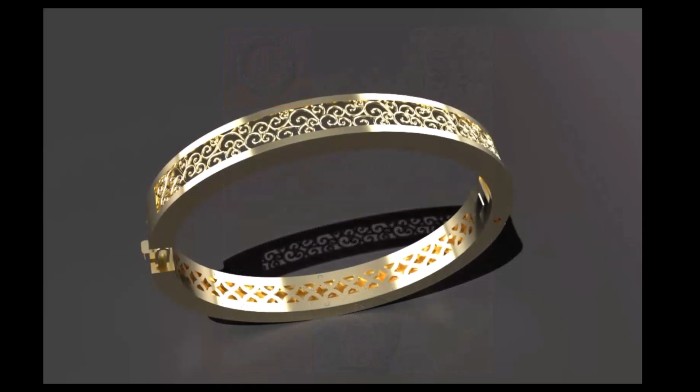Today I'm going to show you how to add a backplate to the hinged bracelet I made a while ago, and that video is in the description below. I also added a lock which fits this bracelet.

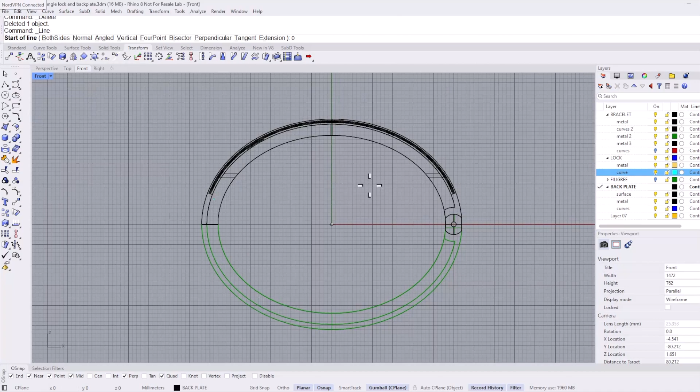I'm going to start with the lock. Go to the front viewport and draw a line from 0, somewhere around here. Then I'm going to make a plane from this line, using a gumball, grabbing the green dot with shift for both sides, and boolean split.

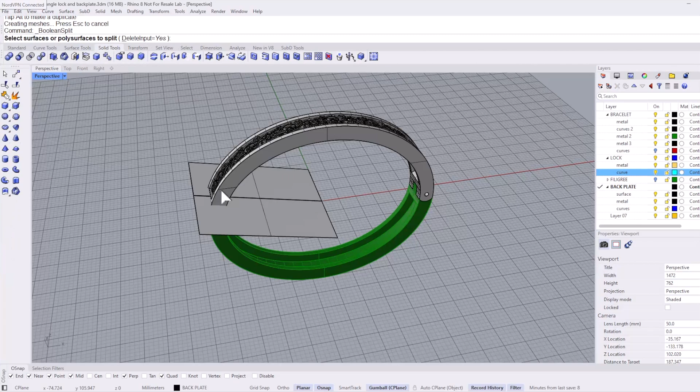In order to make this lock, I will isolate this piece. I love using this isolate object command so I can solely work on this piece. What I'm going to do is create a housing for the lock, but it needs to be a solid piece.

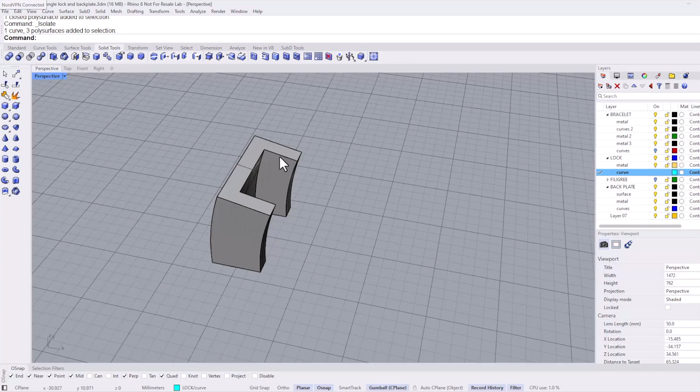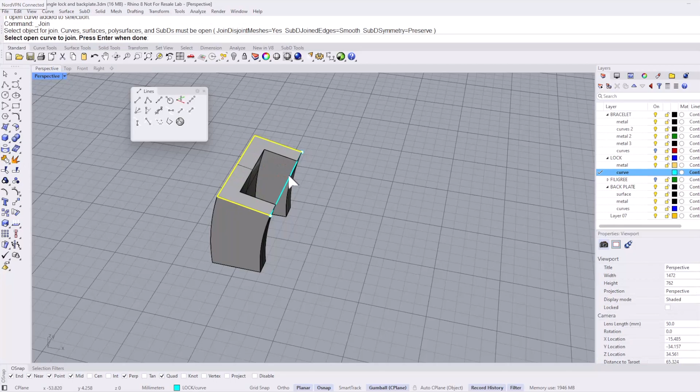I'm going to go to duplicate edge, duplicate the outside edge and create a line, then join to create a closed curve. And do the same thing at the bottom: duplicate edge, join, and create a closed curve.

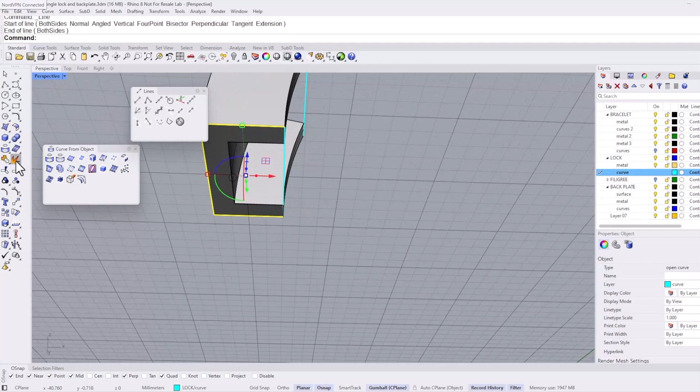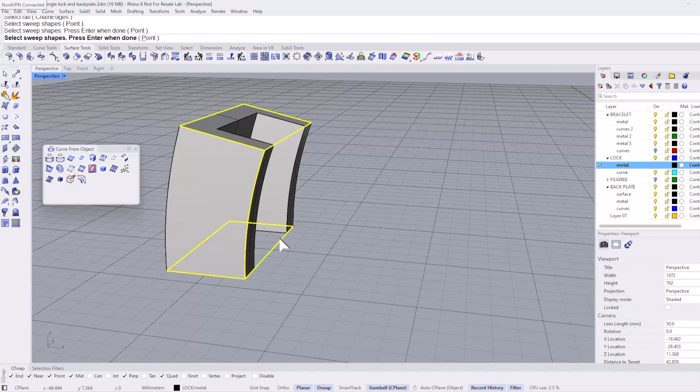I will just sweep one rail. I need a rail, so duplicate the edge for the rail. Sweep one rail - this is the rail, and these are the sweep shape. Here we go. Then I'm going to delete the original one.

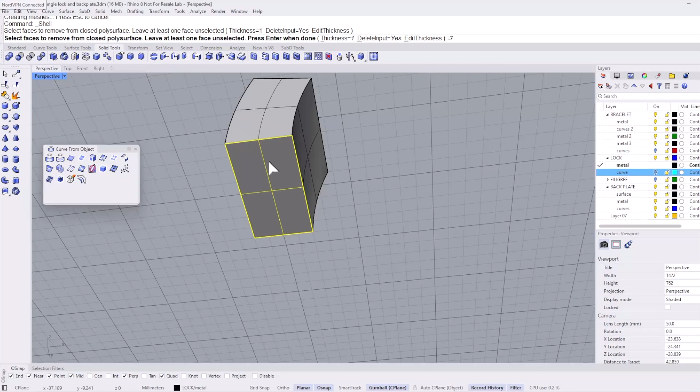I'm going to cap to make it solid. Looking at the bottom, I will hollow it out using a shell command. I'll click this bottom surface, and the thickness is 0.7 millimeter, and enter.

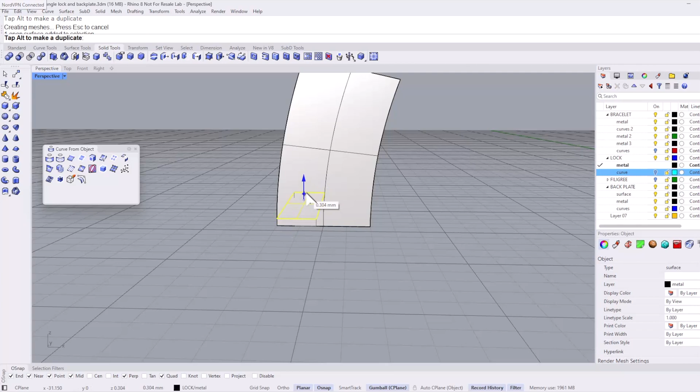Okay, then Control Shift to select this edge, and I'm going to extrude this edge to the surface. I will extrude this surface to create a solid, maybe 0.6 millimeter. Then boolean union.

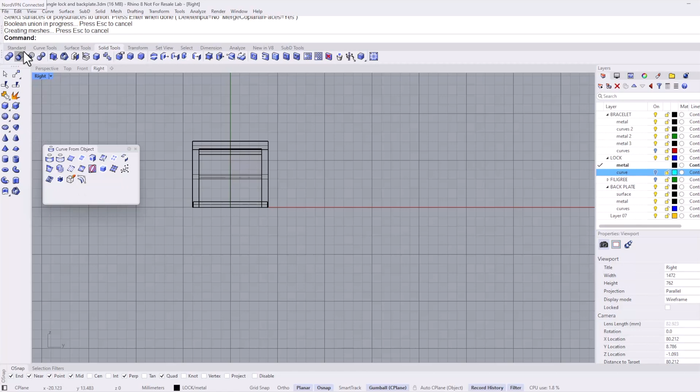Now I'm going to make a cutout for the button. I'll go to the right viewport and create a rectangle, using the rectangle command with the center option. I'll snap right here, and width is 3 millimeter, height doesn't matter.

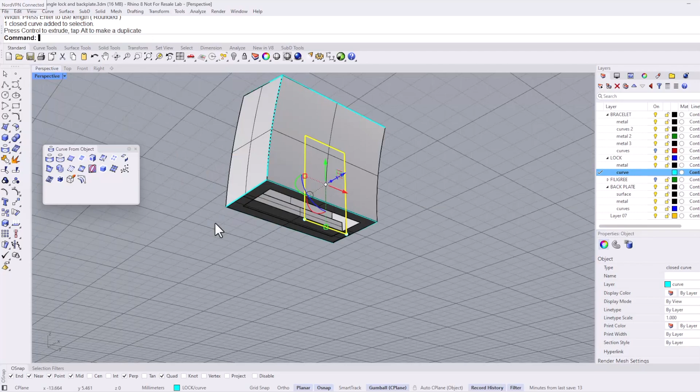Okay, then I'm going to extrude this side. Grab the extrusion dot, and boolean difference.

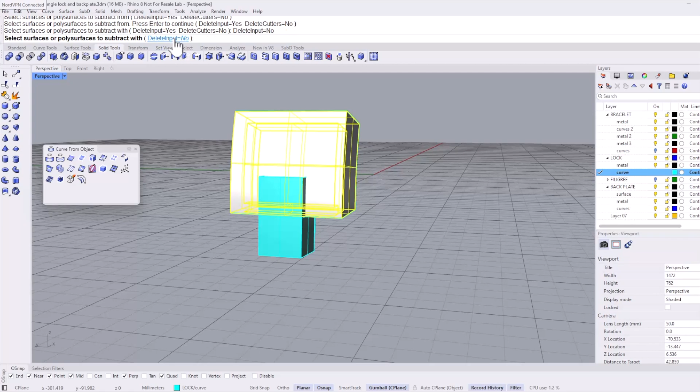Then go back to the front viewport and make a tongue for the lock. Duplicate the edge, this edge here and over here, then enter.

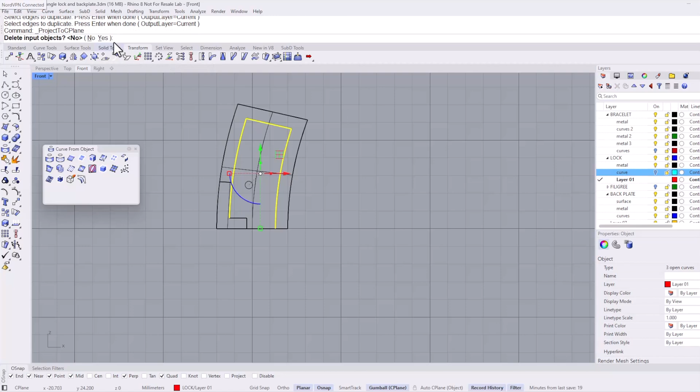These curves are most likely not on the same plane, so I'm going to project it - project to the C plane, delete input, yes. And then I need to join the curves.

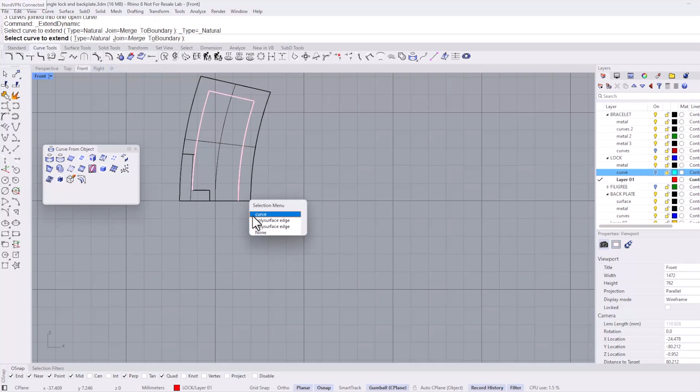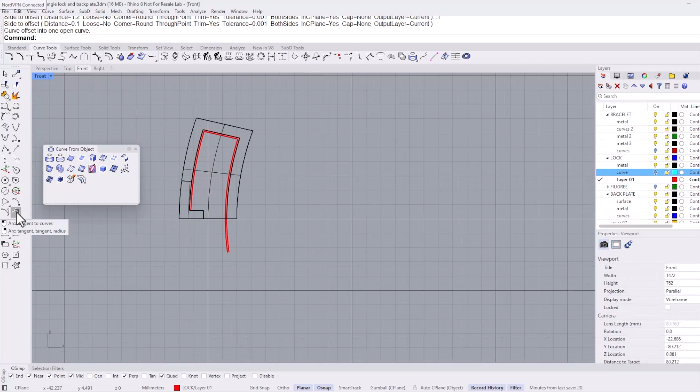Then I'm going to extend this curve, something around here. Okay. Then I'm going to offset this curve 0.1 millimeter inside and create an arc - arc tangent to curves 2 and 3.

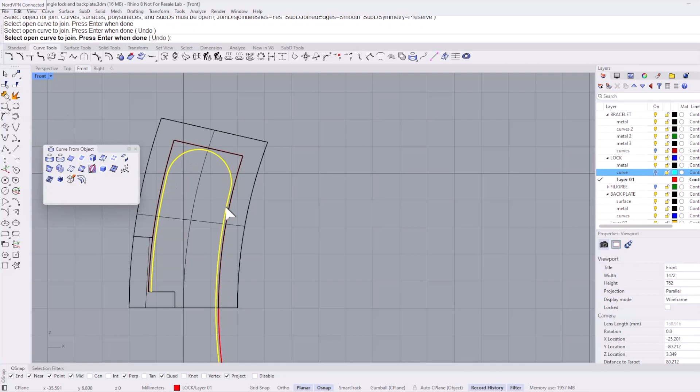Okay, then trim - this is the cutting object. And join those curves. Great. And then offset this curve. We can cap it - flat cap, 0.5 millimeter. Here we go.

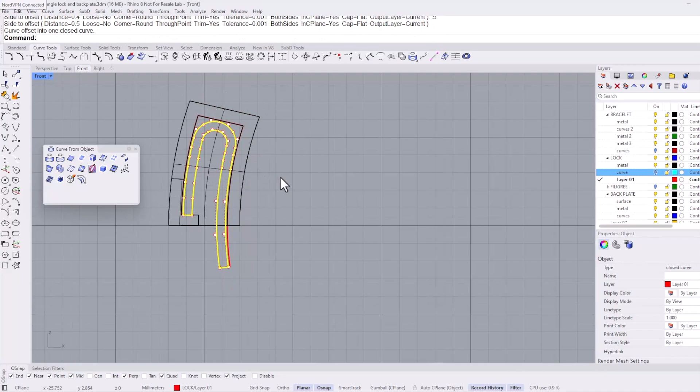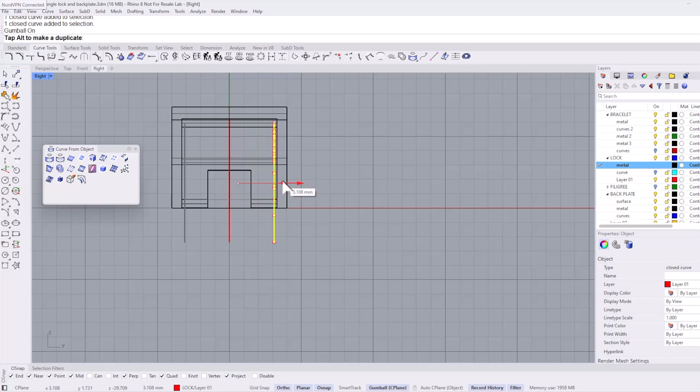And then I would take this curve and extrude it. Grab this extrusion dot and shift. Okay, looks great. Okay, here is the tongue.

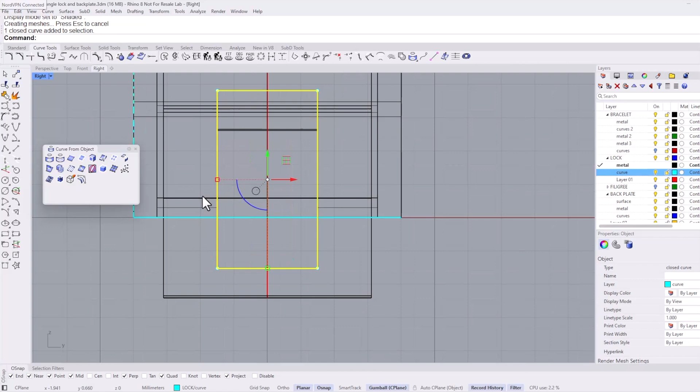I have to create a button, and I still have a curve. I will scale this one because this is the opening, so it has to be a little bit smaller in order to fit it.

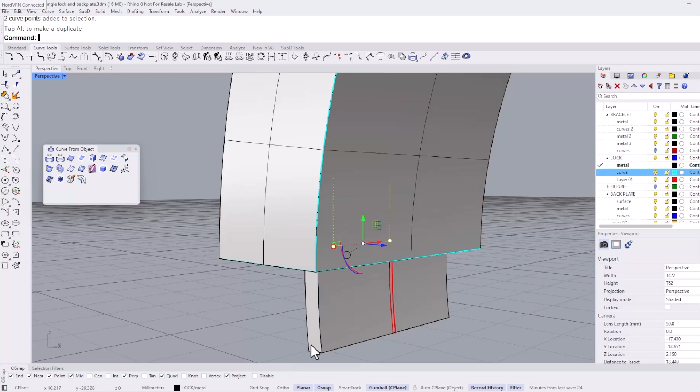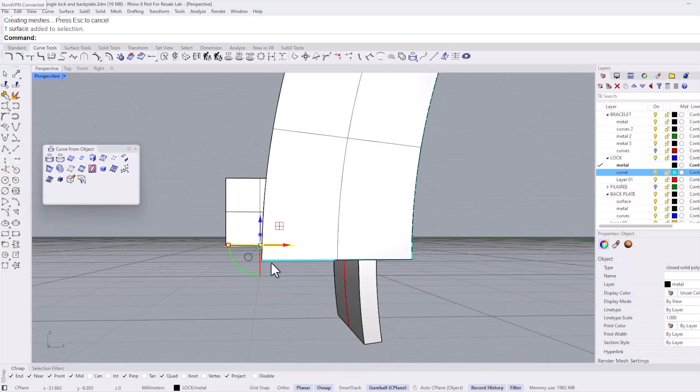Okay, here is a curve, and I'm going to extrude it and adjust the height. Okay, that looks good.

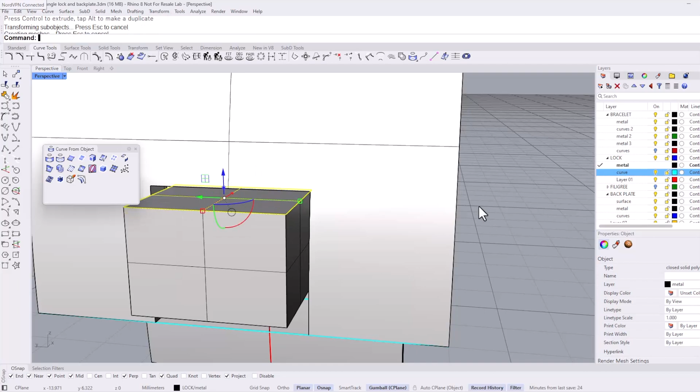And then I'm going to fillet out the edges, 0.6 millimeter, on both sides.

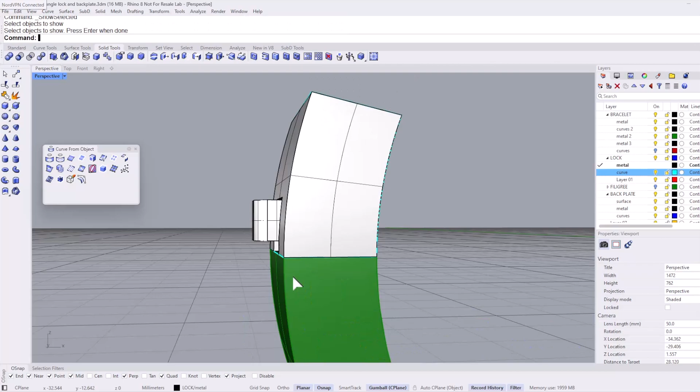I will bring back the bottom part. Okay. I need to add more material to this bracelet to connect to the tongue. Let me hide this box lock layer.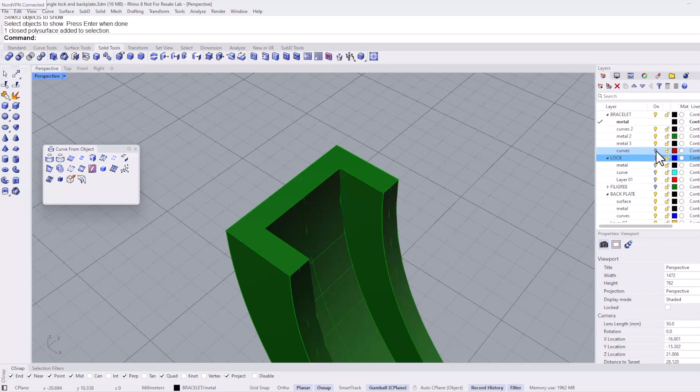Okay, I'm going to duplicate the edge here and split it using the point option, and I will delete the rest of the curve.

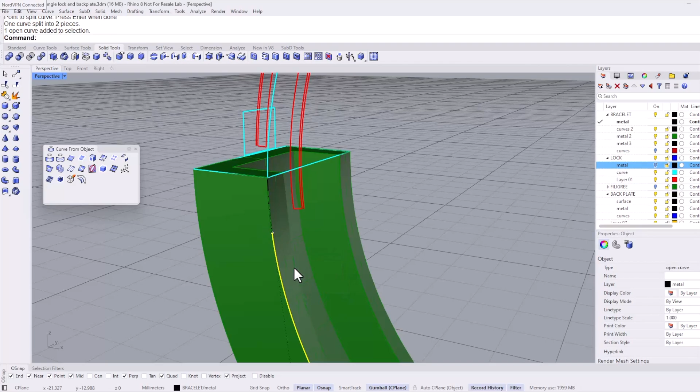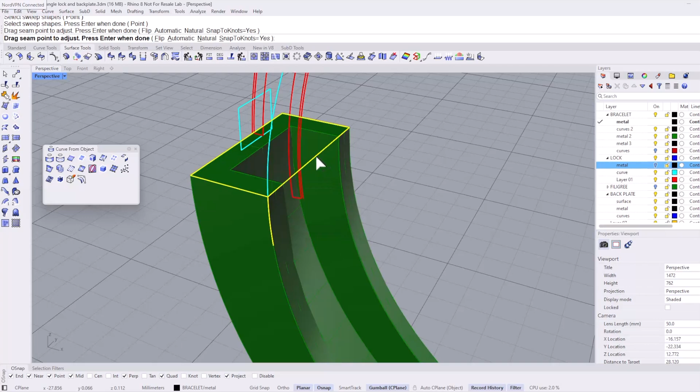And let's see if I can do sweep one rail. Surface tool, sweep one - select the rail and select the sweep shape. Enter. Great.

Okay, then I'm going to cap and then boolean union. Here we go.

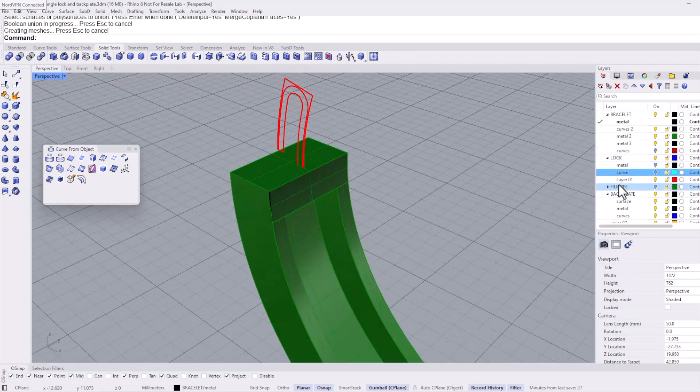Okay, then I'm bringing back the lockbox. Let's see. I'm going to boolean union the bottom part and the tongue.

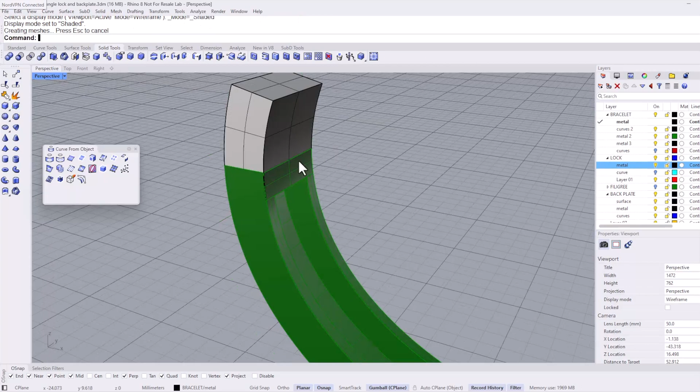Then bringing back the top part of the bracelet and boolean union with the lockbox. This is how it looks in a front viewport, and it looks good.

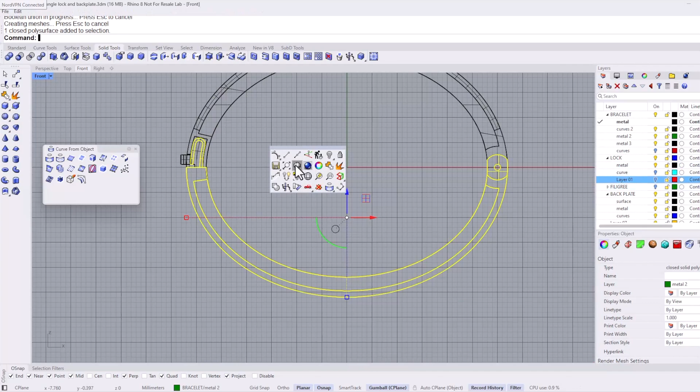And I'm going to rotate this top piece so you can see how this hinge and lock works. Here we go. Oh, I forgot to boolean union this piece.

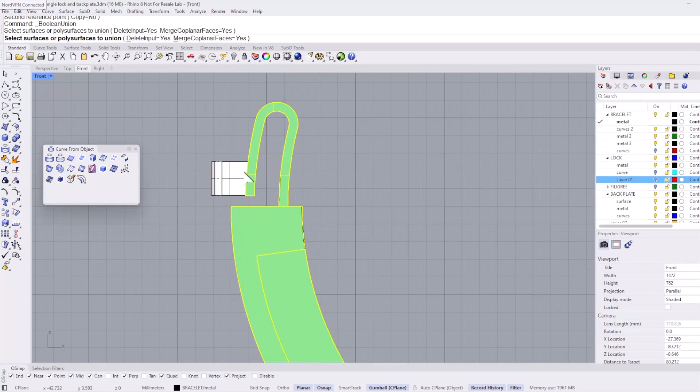So now we're going to create a backplate.

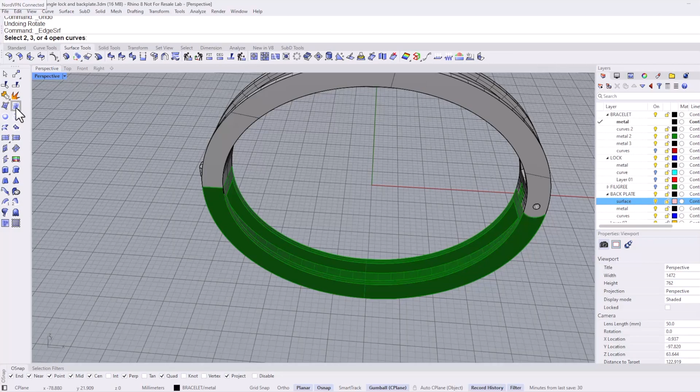So I'm going to make a surface. Go to the Surface Tool tab and Edge Surface command. And 1, 2, 3, 4. Okay.

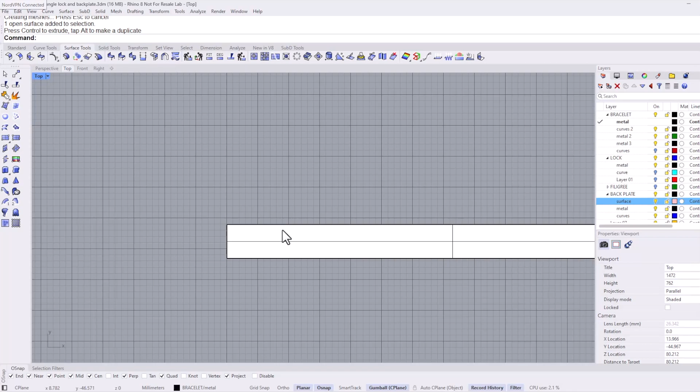Then I'm going to unroll and draw a pattern for the backplate. I'm on a top viewport. Duplicate the border. Here we go. Then offset this curve 0.8 millimeter inside.

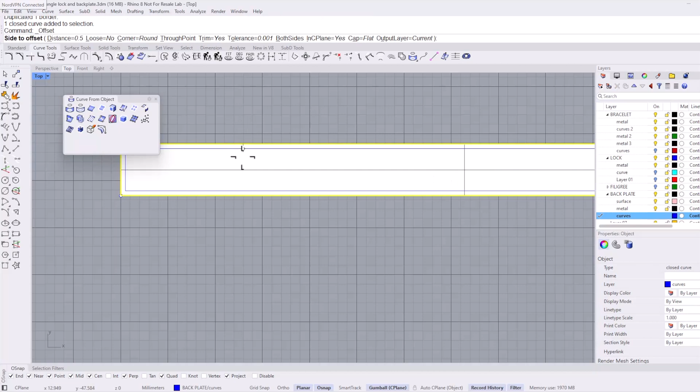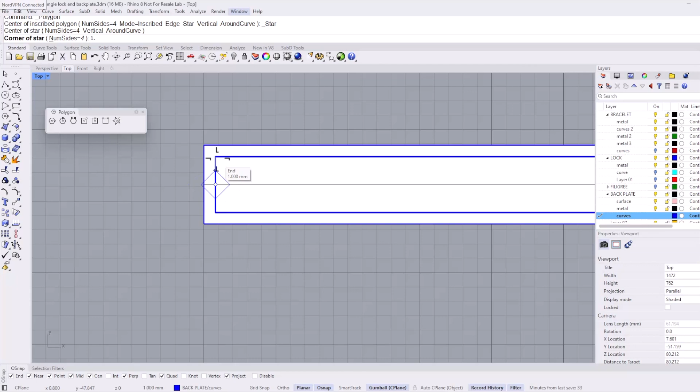Okay, then start creating a pattern. I will use a star command, polygon star command. Center of star is right here in the midpoint, and number side 4 is fine. And corner of the star, I type 1, and a second star radius is 0.8. Then enter. Okay, then offset curve.

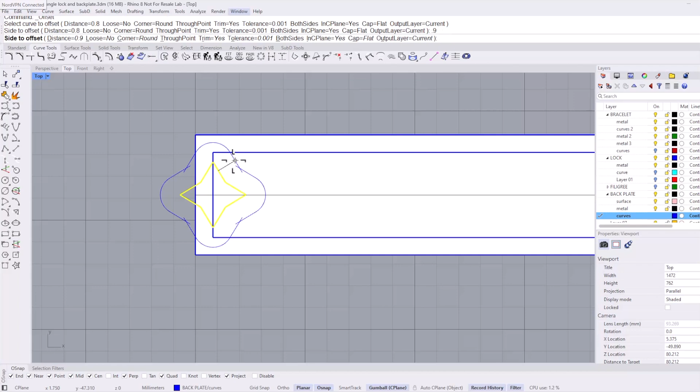Offset this one 0.9 millimeter. Here we go. And I'm going to array this pattern on a surface.

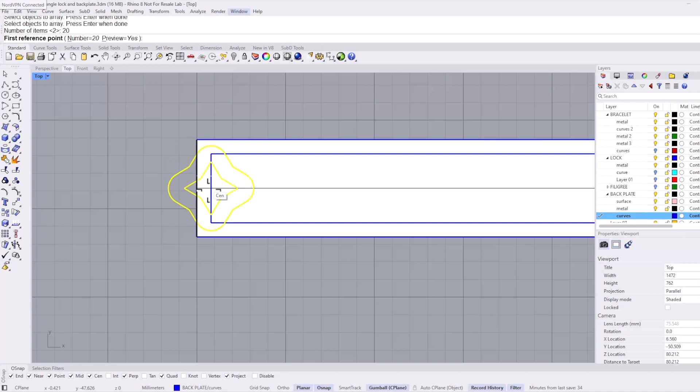Linear array command. Select the star, enter. Number is probably 20, enter. First reference point. Okay, it's kind of hard to see it, so I change it to the wireframe.

Select the object. Number is probably 20, enter. First reference point, I snap the left side of the quad point, and second reference point, I snap at this end point of the star.

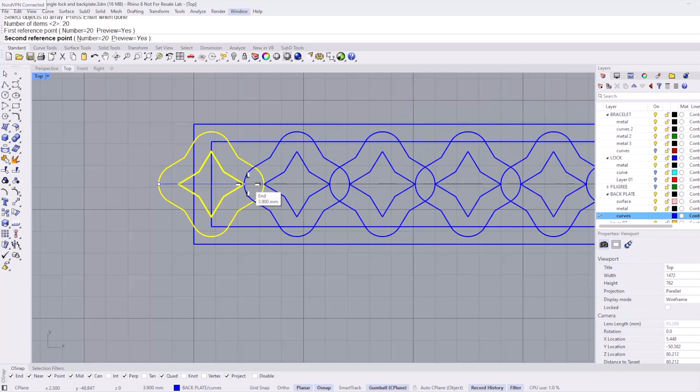Here we go. Yep, 20 is too much. I will delete the last one.

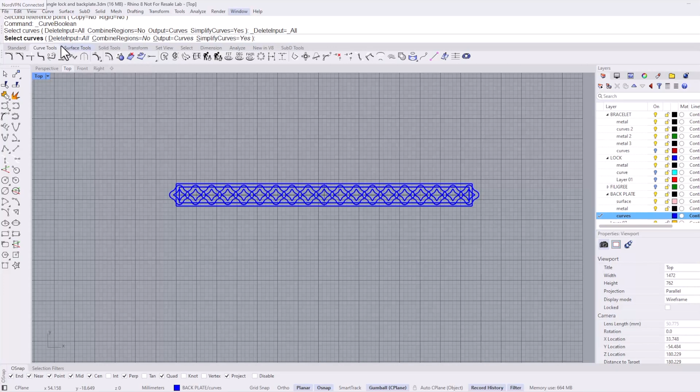Right-click Curve Boolean for Curve Boolean delete input, and make sure delete input is all and combine region is no. And select all the curves except outside rectangle.

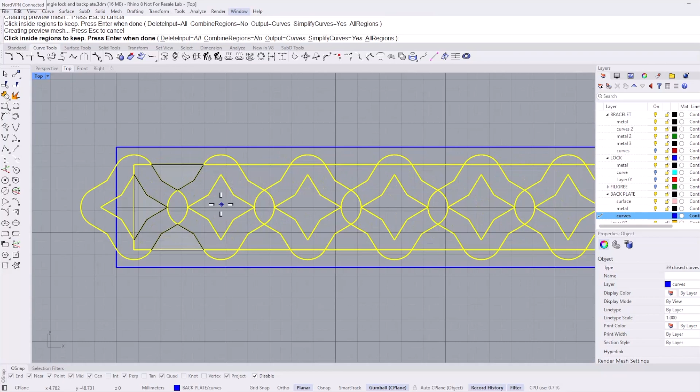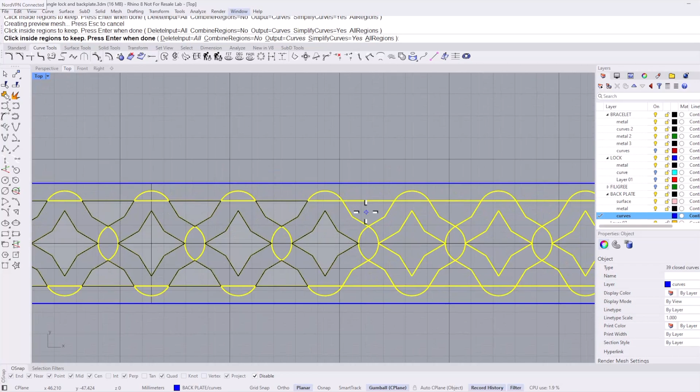Then start clicking the negative space. And those parts turned to yellow will be deleted at the end. And enter. Here we go.

Okay. And then turn on the base surface, and then flow along surface to flow these pattern curves to the surface of the bracelet. Transform, flow along surface command.

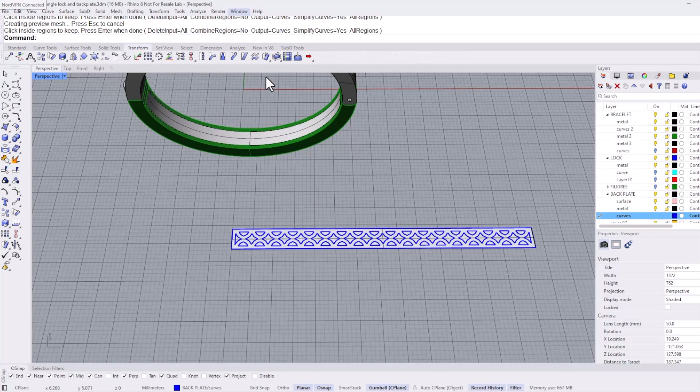Select object to flow along surface. I select those curves, enter.

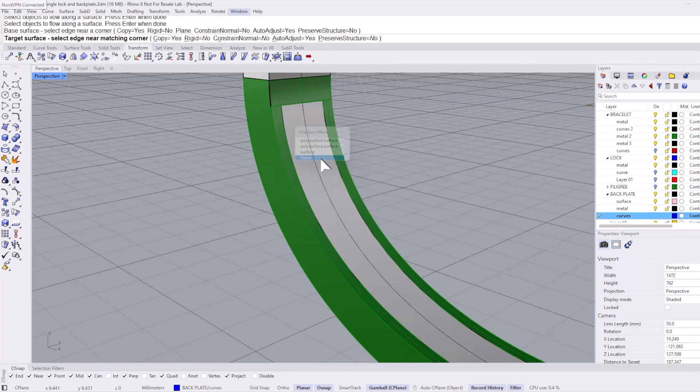I will select this edge near corner. And target surface, select edge near corner. I'm clicking target surface edge at the matching corner. Here we go.

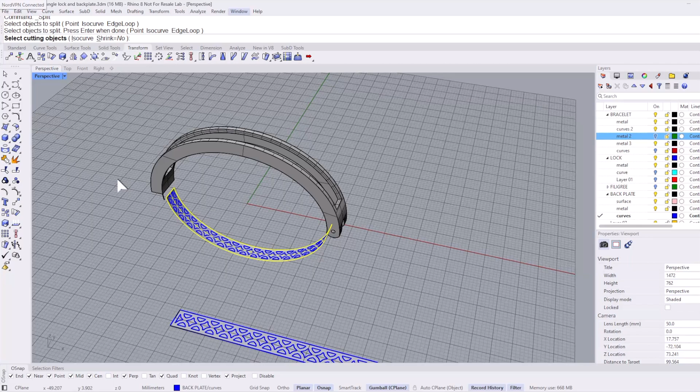I'm going to turn off this bracelet and split command. Select the object to split, and cutting object is this curve. Then enter.

Yep, it's split it, so I'm going to unlock it. And delete all the negative space surfaces. Okay.

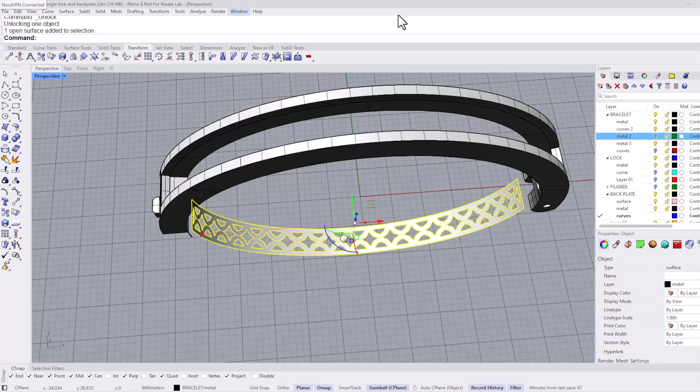And then go to the Surface Tool tab, Offset Surface, Offset Down, Solid Yes, 0.8 millimeter. Okay, great. Okay, so this is going to be the back plate.

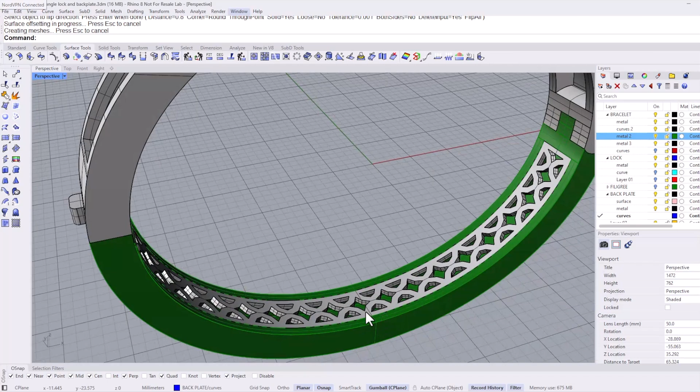So in order to solder it, I have to create a notch. I will turn off the bottom bracelet and top bracelet. I'm in a front viewport.

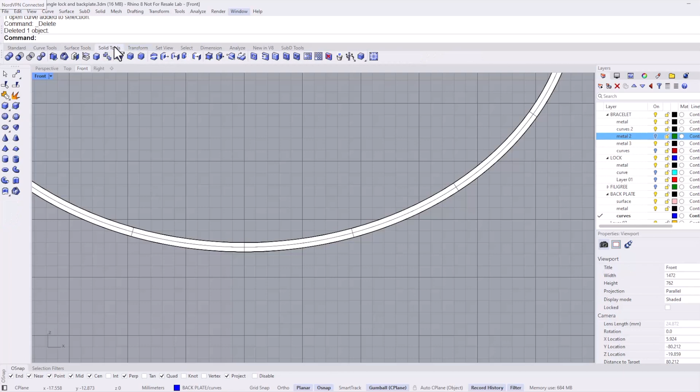I will create a little box. Solid tool, box command. Maybe I would start from here, maybe 0.8 millimeter cube.

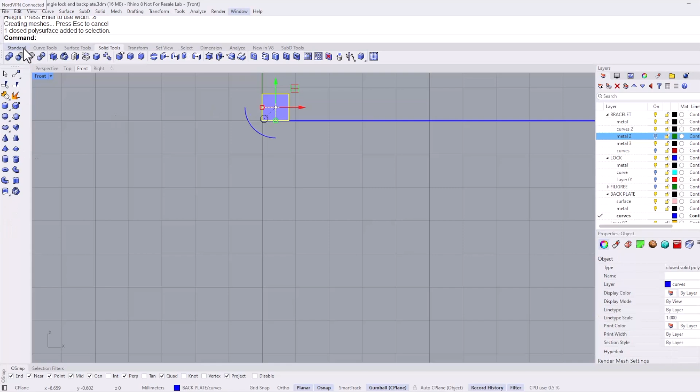And I'm going to align, vertical center, then bring it down. Okay, right here. I'm going to bring it over here.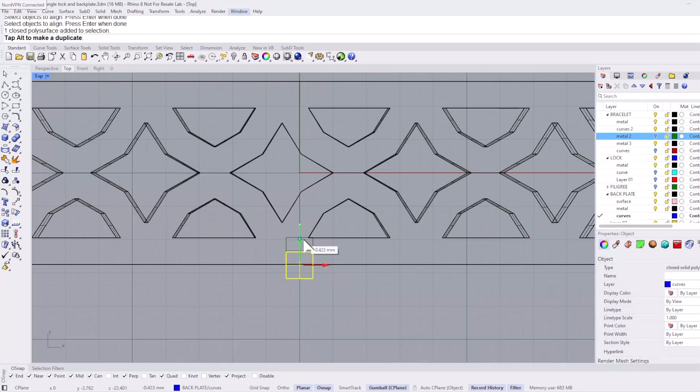I go to the front viewport. Okay, I'm going to rotate this piece. Copy yes. One for here, one for here.

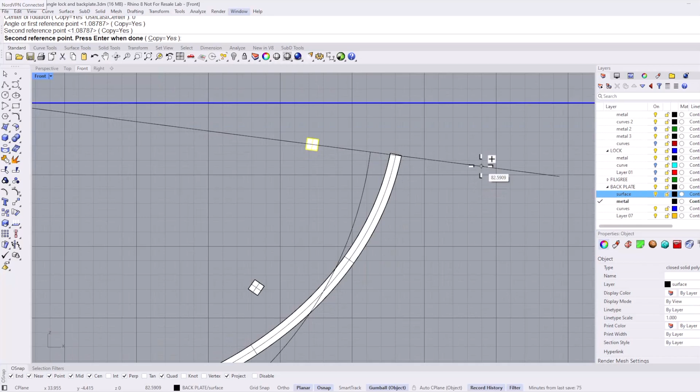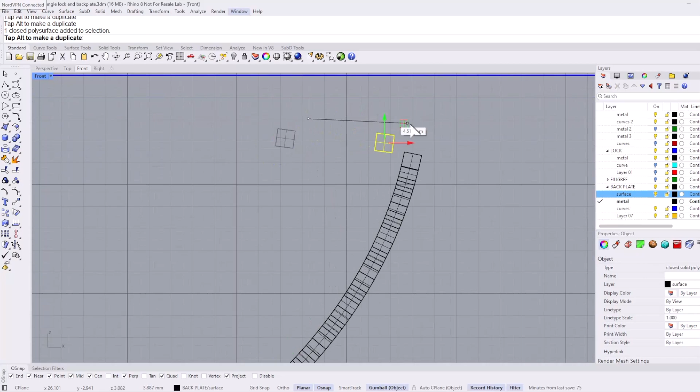Okay. Then I'm going to move it and aligned. Easier to do it in a wireframe. So this one is going to go to the center.

And I will mirror to the other side of the y-axis. And these, so this one also the other side of the y-axis, and then we're going to mirror to the other side of the x-axis.

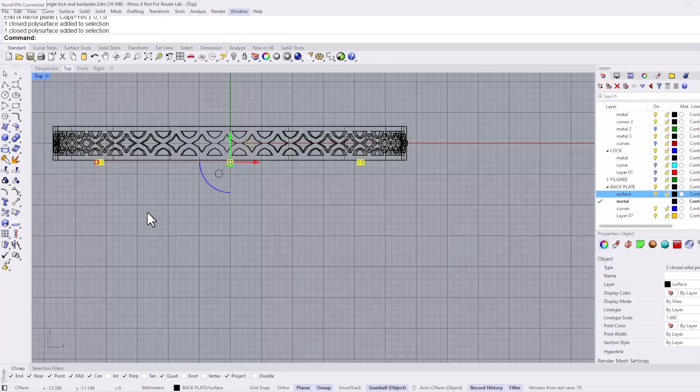Okay, these cubes will put in union with the plate, and we would need to have indents on the bracelet to hold this back plate.

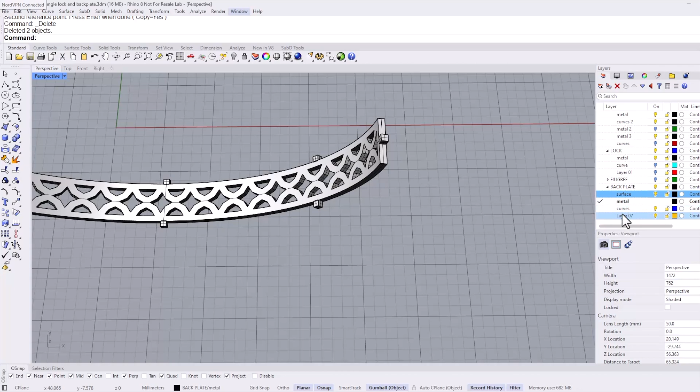So what we're going to do is I'm going to create duplicate, maybe 10% bigger. So I will hold down Shift and Alt key and 1.1, and I'm going to change the layer.

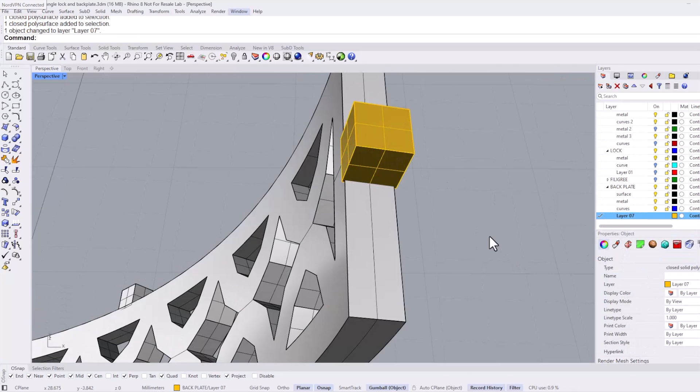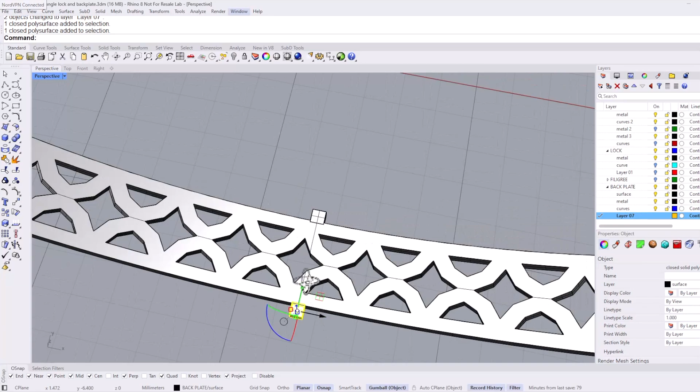Okay. So these two, hold down Shift and Alt, and move the layer. I have to make sure that I'm choosing that larger one.

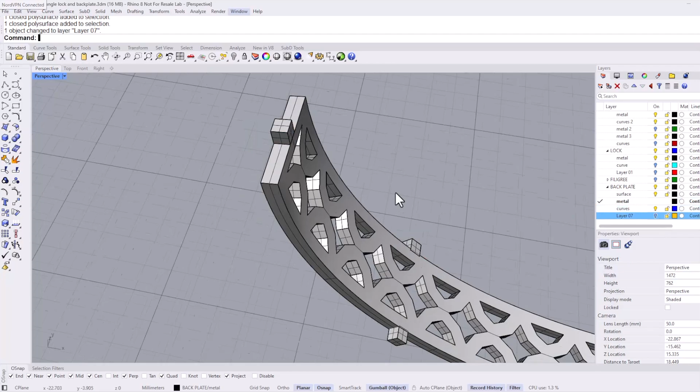Okay. Alright, so now I turn off the notch layer and go ahead and Boolean union.

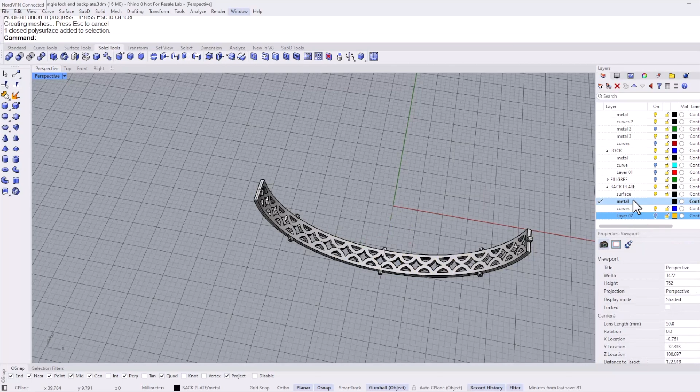Okay, worked. And now I bring back the bracelet. Let me turn off the back plate and turn on the notch.

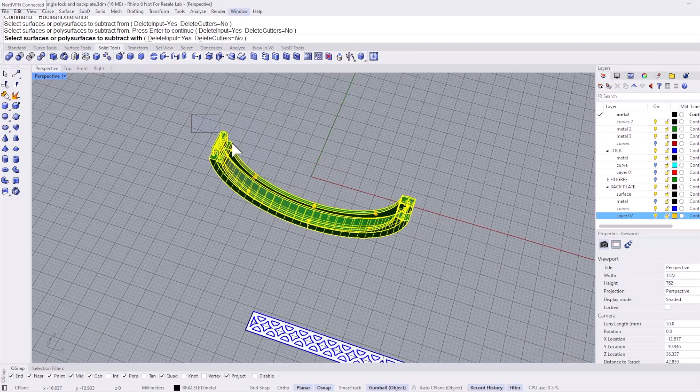Boolean difference should work since this notch is extended from the edge of the bracelet. Here we go.

Here is a little notch so that the back plate will fit there. This way, when you assemble, you will solder it, and then this will be attached to the bracelet.